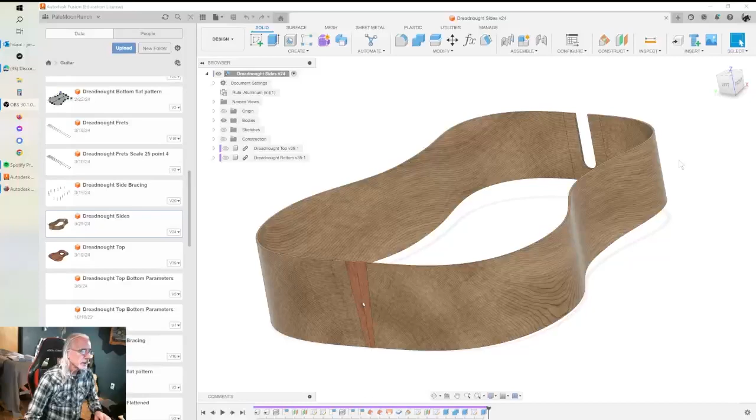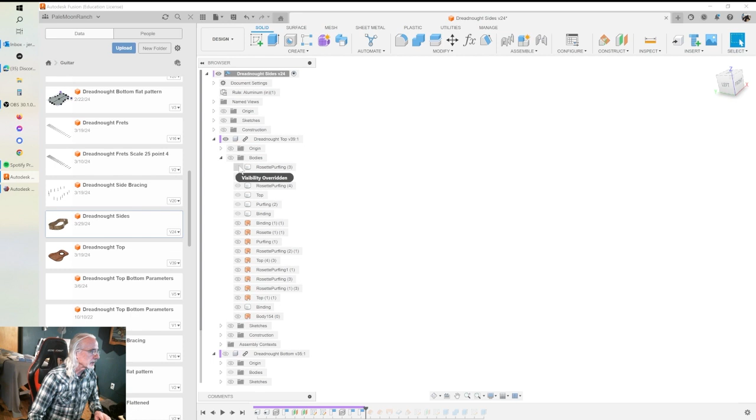I'm going to back up my timeline here, and going to just quickly create my side. So I'm going to turn on my top. We go into my bodies, and I'm going to turn off all the solids and go back to my surfaces that I used to create it. So what I want is my purfling, my binding, and my top to give me that full top.

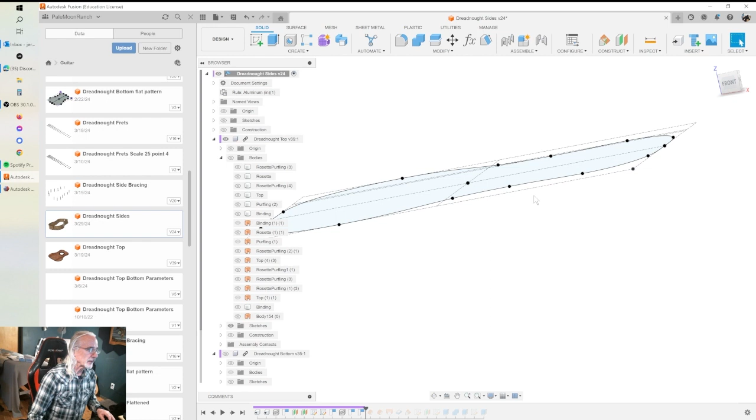And actually, sorry, I'm going to turn those off real quick. I'm going to go to my sketches first. I want to extrude the beginning of my body. So what I'm going to do is go to surface, extrude, select the shape of my body. I'm going to extrude two sides. I'm going to get it up above and down below the bottom.

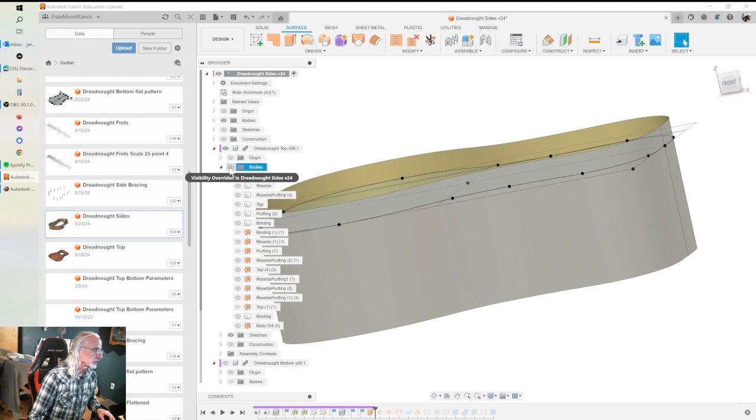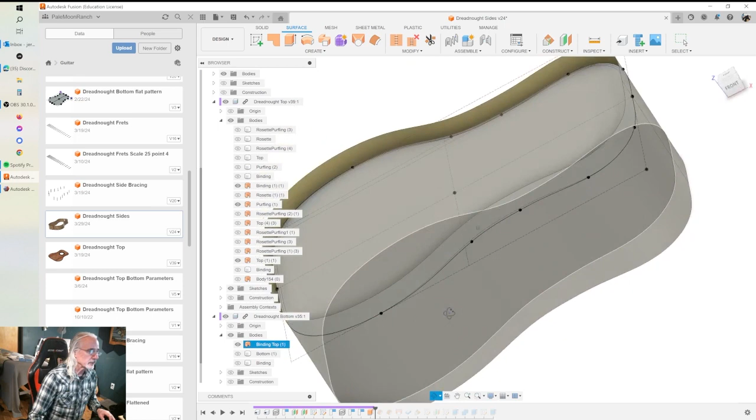Okay, now I'm going to turn off that sketch and turn back on that top body, and I'm going to turn on my bottom body. And turn off the solids and just turn on the surface. So now I've got this. So now I'm going to do a split body. I'm going to select this as my split, and the top and the bottom is my cutting tools.

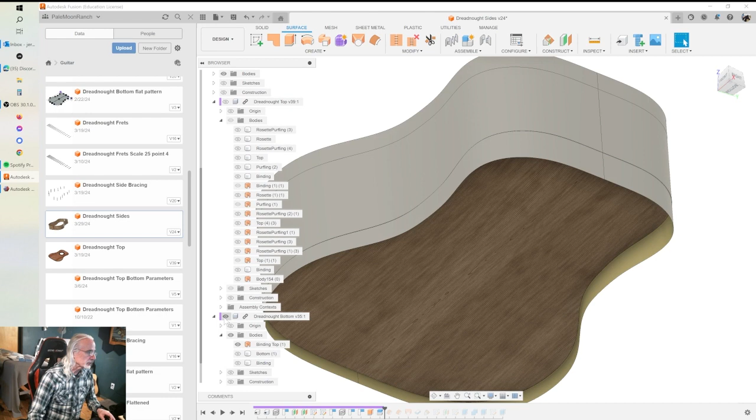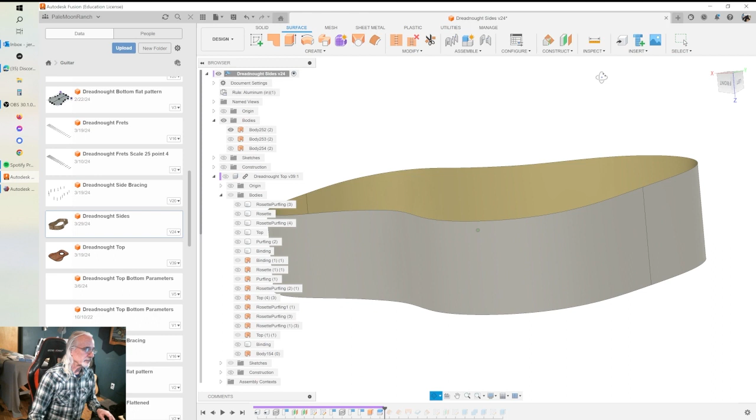And then we'll turn off our tops and bottoms and go back up here, and in our bodies we now have three. So I'm going to turn off this one and this one. Oops, nope, this one, gosh darn it, there we go. Okay, so there's our straight up and down sides, with the radius top and the radius bottom that we just cut in with those other things.

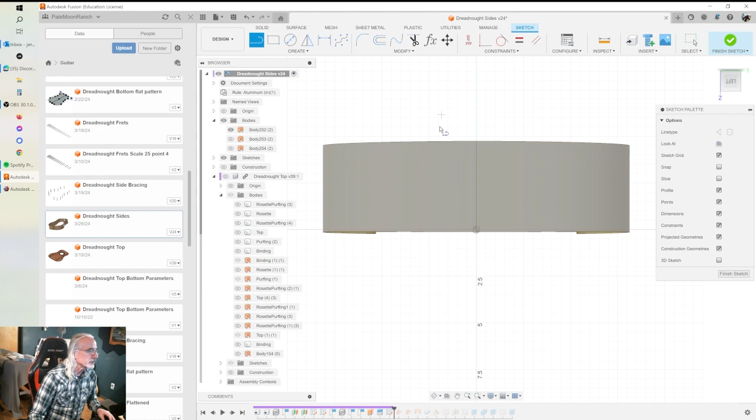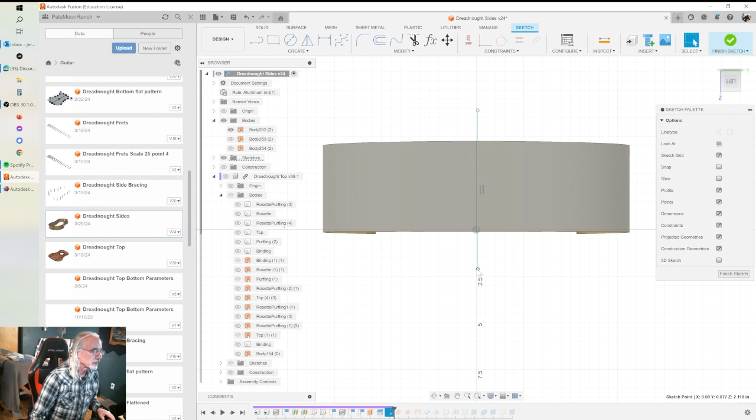So then to get my flat pattern, I'm going to cut this in half. So I'm just going to grab a sketch real quick. I'm going to put it on this plane, and I'm just going to draw a straight line. Here, and I want to break that constraint there because I want to get it down below. So I'm going to grab that and pull it down. Use a midpoint here to constrain it to the center of the guitar right there. Okay. And I don't care how big this is.

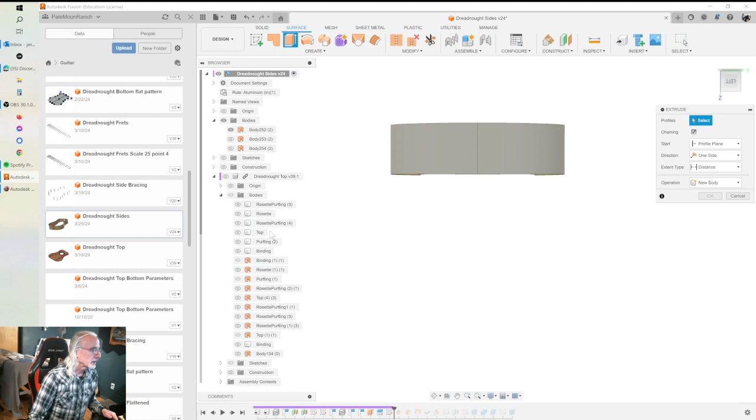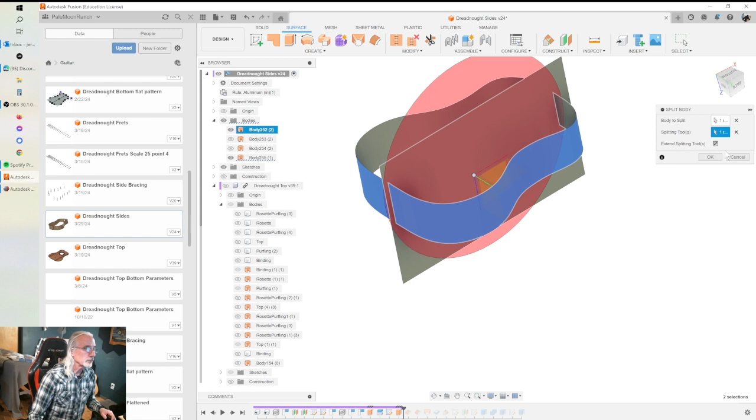What I'm going to do is now go back to my surface, and I'm going to do an extrude. Turn on my sketch. I'm going to grab that line, and I'm going to do a two-sided extrude here. I'm going to pull that through there, pull it through there, and then we're going to use that as our cutting tool. Jump in here, do a split body. We're going to split this. We're going to use this as our tool. Say OK. And now we've got half of the side. Okay.

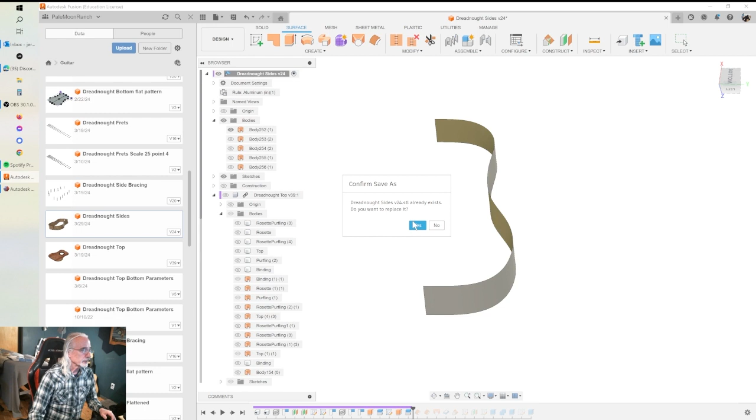Then I'm going to export that as an STL file here as a mesh and export it. Okay, the export is complete. Now I'm going to run over here and grab MeshMixer. And I'm going to do an import. And I'm going to go grab that STL that I just did, my Dreadnought side, and open it. And I got this.

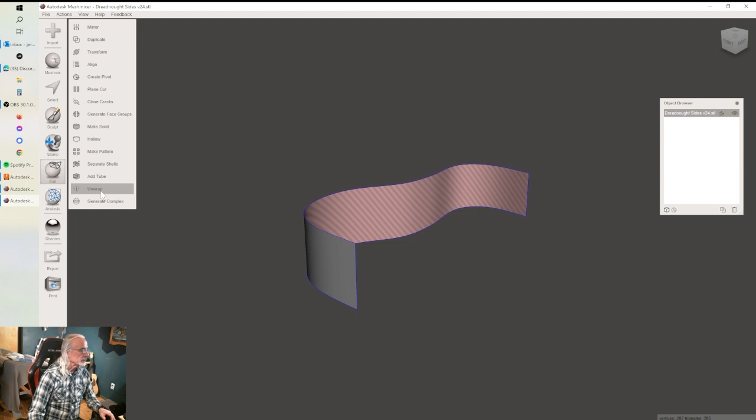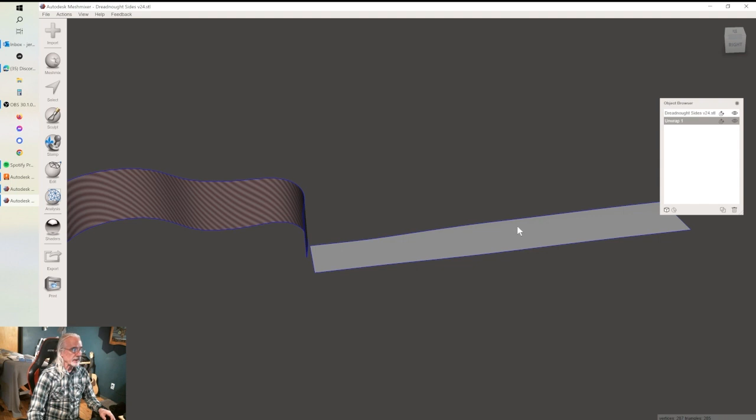And now I've got a new body in my object browser. So I'm going to select that flat pattern now. And I'm going to export that. And we're going to call that same name, but I'm going to add flat pattern in here just to create a separate STL. I'm going to save that.

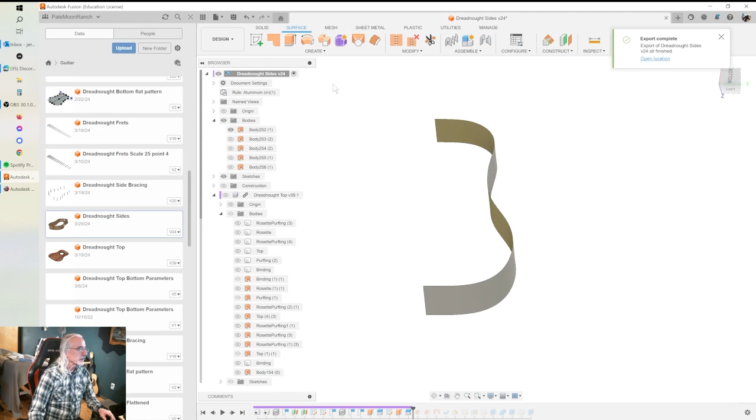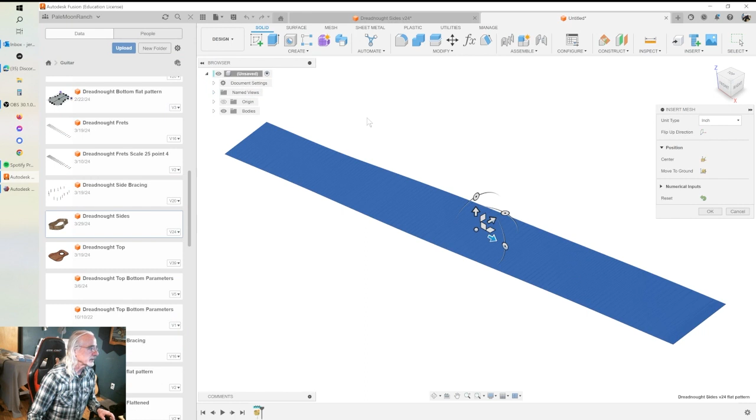Okay, I'm going to get out of here, and I'm going to come back over here, and I can either bring it in here, or I can create a new model, and I'm going to do an insert mesh and select my computer, and I'm going to go get that Dreadnought Sides flat pattern and bring it in, and there's my flat pattern.

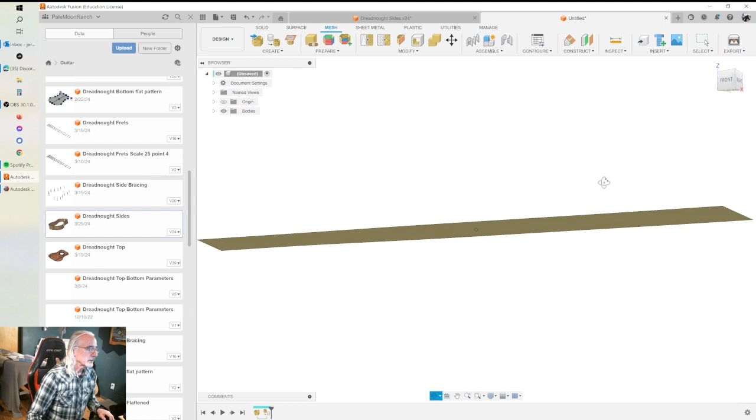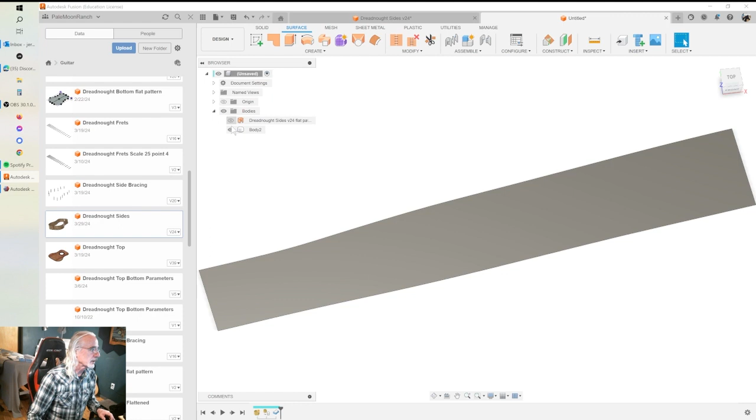So from here I can go to my mesh tools, and I'm going to do a convert mesh. I'm going to select that body. I want to use prismatic and say OK, and there I've got a surface. So then all I need to do is grab that, and I can go back to my surface tool, because this is now a surface, and do a thicken. And I can thicken that as wide as I want my sides to be. And now I have a solid body that is my flat pattern for my sides.